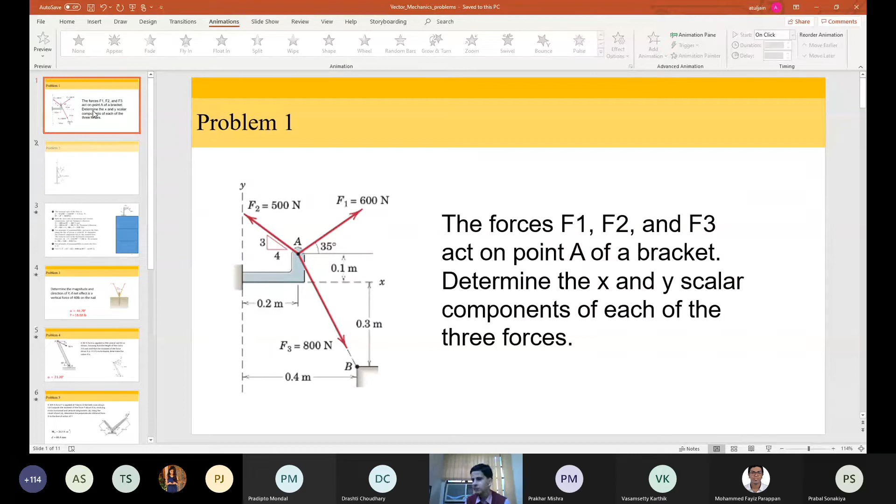So it's visible, correct? Look at this question. Is the PowerPoint visible to everybody? Yes sir, yes sir. So sir, look at this problem - it was also given as a part of your lectures.

Now, first of all, look at the figure carefully. What do you see? You see that there is a point and there are 3 forces in that. I'm sure all of you know that force is a vector.

Now in this figure, the first thing you should notice is that there are 3 methods given as to how the direction of a force can be specified. The first is most common, where the angle is given directly. The second is where a right angle triangle is given, the base and the perpendicular is given - when you approach situations like these, it is straightforward. The third one, the angle is not given in a straightforward manner - you have to calculate using geometry.

Can anybody tell me what is this angle, which I have drawn by 2 lines? 37 degrees sir. 45 degrees. 45 degrees, because 0.1 plus 0.3 is 0.4, and 0.4 is both the base and the perpendicular, so it is 45 degrees. No sir, no sir, it's tan inverse 2. It's tan inverse 2, correct, you are right.

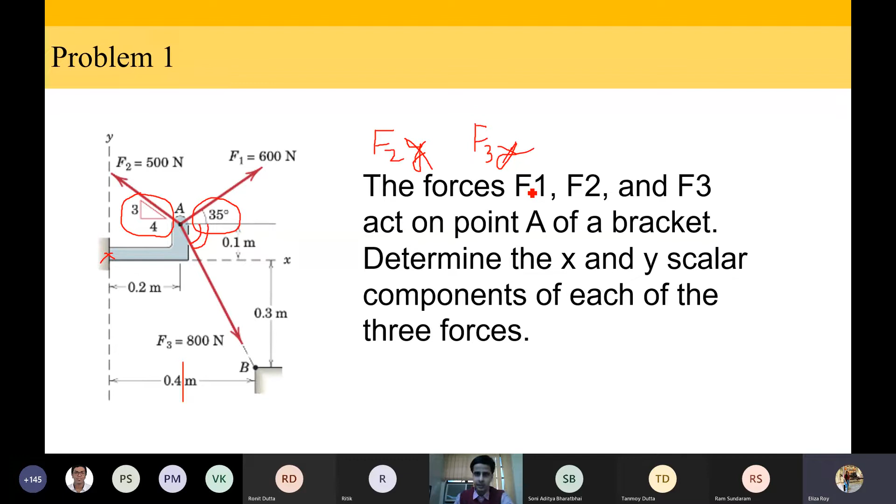No sir, it's the opposite - F2's X component and F3's Y component. Yes, that's correct. So this is easy, but make sure that you understand these things well.

Now look at the figure at the top right hand corner. If I tell you that you have to calculate the moment of force A about point O, how will you do it? First of all, what is the direction of R cross F?

K cap - sorry, inside the plane. Perpendicular to the plane of paper. Correct. So R cross F is mutually perpendicular to both R and F. Correct or not? Yes, sir.

Now my question to you is, physically why is that happening? Can anybody explain? One at a time, please raise your hand if you want to explain. Why is the moment about a point perpendicular to both R and F? Why?

Md. Shahreyar wants to answer. Sir, because moment is the cross product of position vector and force vector, the direction follows from cross product in physics. But that is all mathematical - I want a more physical explanation. What does the moment about a point signify, and why is that perpendicular to both force and radius?

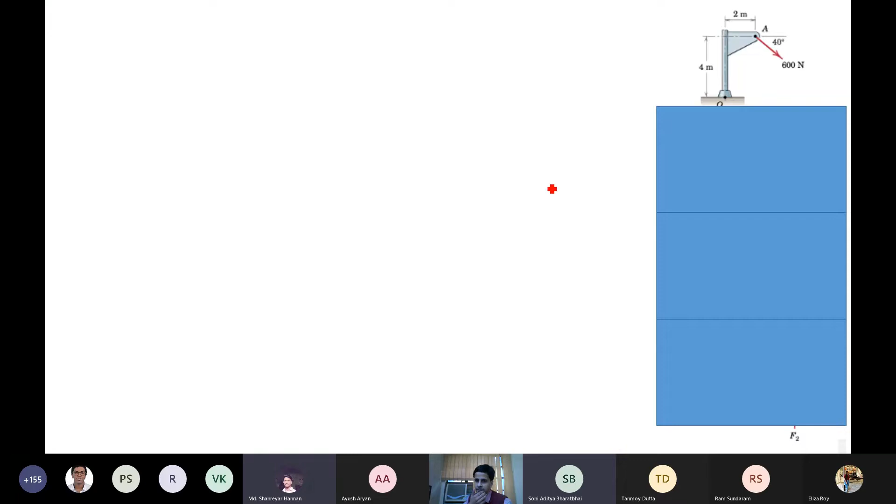There are a few more people - who wants to go next? Perhaps it is the direction in which a screw progresses. Soni Aditya, you want to try? Basically it's torque - the direction of torque will be the direction of angular acceleration which will be produced by the force. So if we look at this system, the force produces a turning effect, and the direction of the turn can be related to angular acceleration. That is correct.

So I am stopping the share to show you something. Imagine that you have a book kept on the ground, and you are holding the book from one side. Now if you apply a force in the plane of the book at one edge, what will the book do? The book will have a tendency to rotate. What is the axis of this rotation? Vertical, perpendicular to the book. Exactly. So when we are calculating moment about a point, this is what we are trying to do.

Clear? That is why the moment is going to be perpendicular to the force and the radius. Can you please explain again? My point is, imagine that a book is lying in a plane, or you are holding a book from one corner. I should normally be visible - I can see myself, so something is wrong with your setting. Now you are visible, sir. So imagine that you are holding a book from one corner, or that book is lying on the ground.

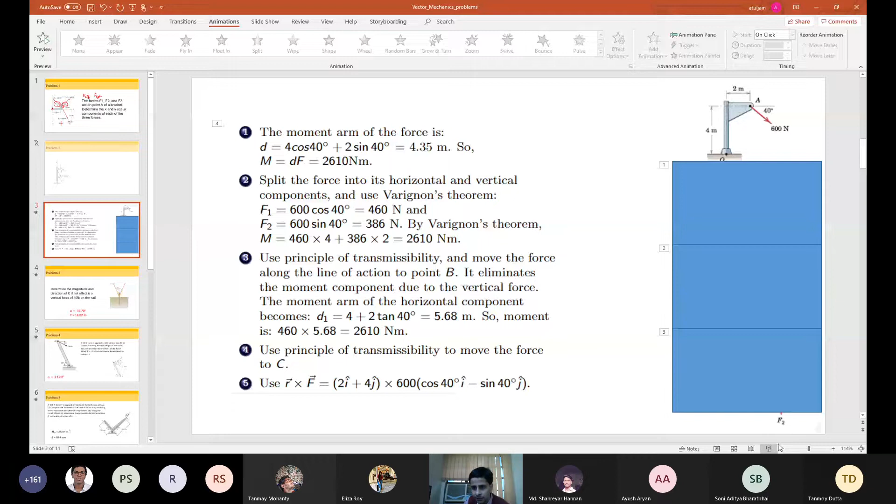Okay, so now I am looking at this. Now we have a force whose magnitude and direction is given, and we want to calculate the moment about point O. What are the different ways by which we can do this?

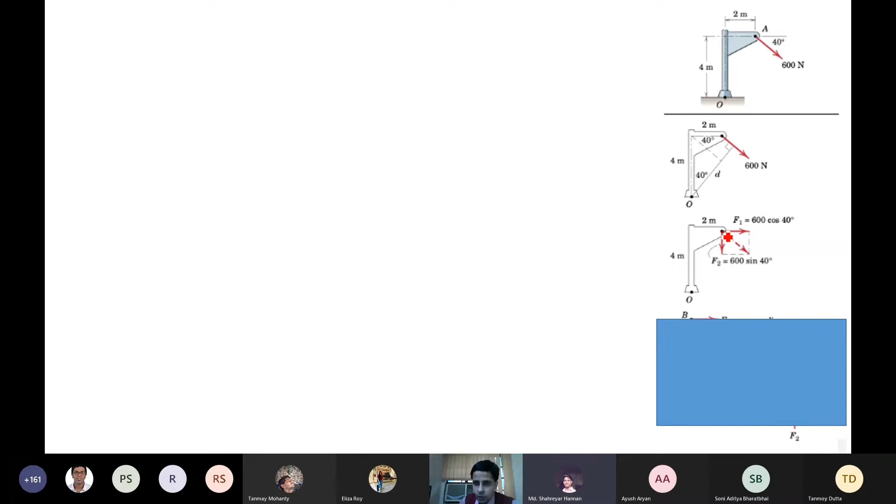First, we can calculate the perpendicular distance between point O and the direction of the force, and do F cross D. Or I could decompose the force into x and y components, using cosine and sine, and then calculate the moment - it would be F1 into this length, F2 into this length.

Or we also know that forces have this condition of transmissibility, so I can take my force to a point such that it is passing directly over point O. In that case, the F2 component will not lead to any moment - it will be F1 into OB, or similarly F2 into OC.

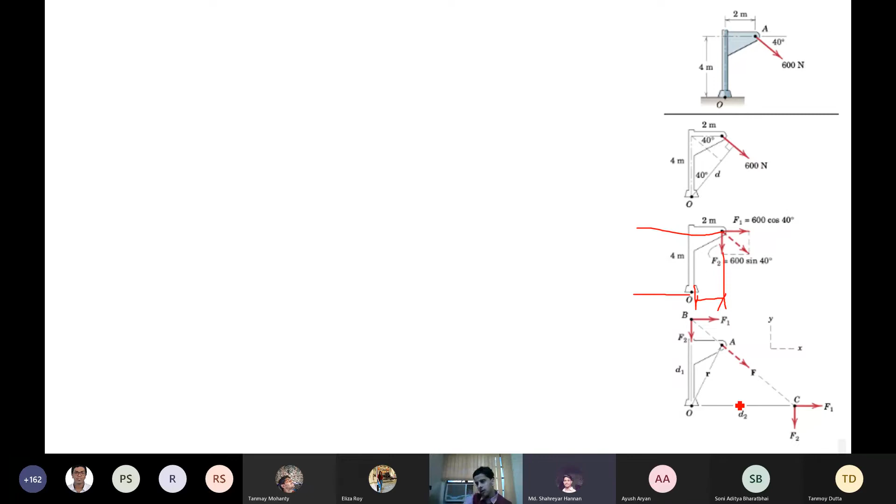So there are actually 5 ways, in fact many more ways when you think of it, to calculate a moment about a point. None of these 5 is wrong, and there's absolutely no reason to prefer one over the other in a general sense - it all depends on what problem you are trying to solve. In this course, there will be no marks for using a specific method. If you had to calculate moment about a point, you could do all 5 or any one of the 5, all would be correct. So our mechanics is very open-ended that way.

But it is nice to know all the different methods, because in different contexts, different methods will be much easier. So is the 5 different options of calculating the moment clear? This is also explained in the video by Dr. Puneet Patra.

Yes, sir. So from this slide, please take home the message that there is no one specific right way of doing it. It is open-ended, and as you go deeper and deeper into your engineering, it is going to be more and more like there is no only one right way of doing it. There are many ways - you have to choose as engineers, as students, which you want to do or which is more suited to a particular application.

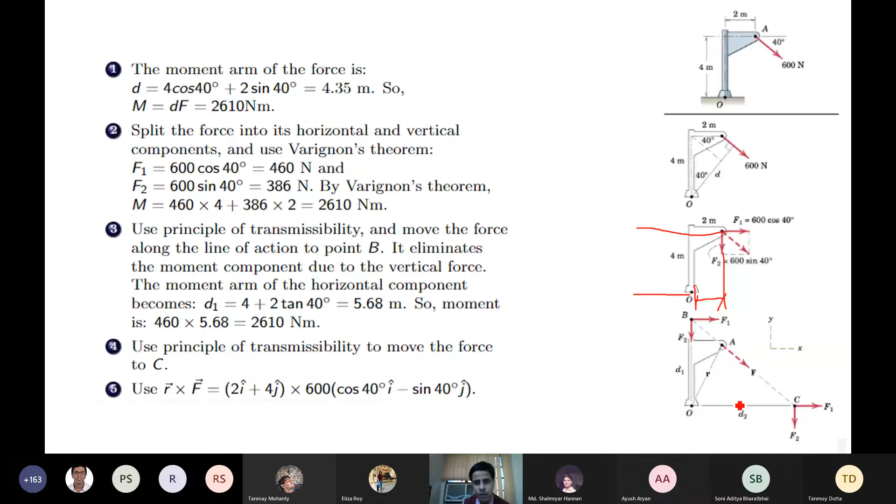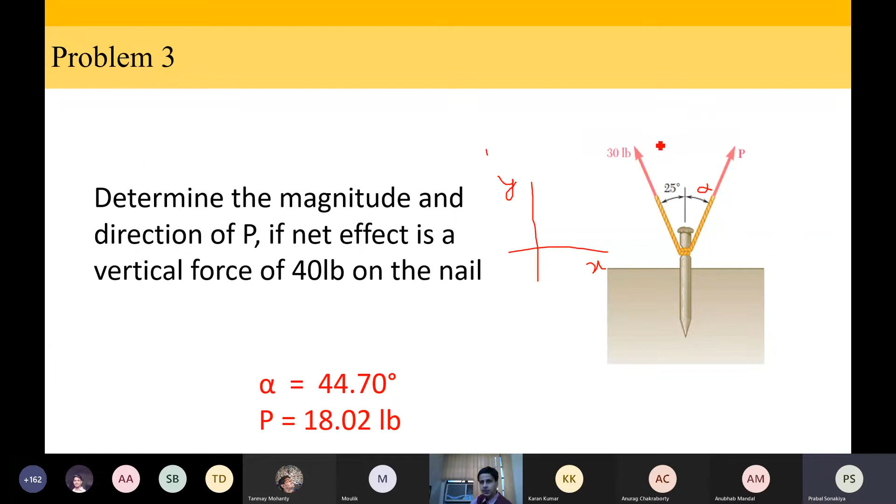So now let us look at another problem, which also I'm sure all of you have done today. We are just warming up.

Sir, in the previous problem, just for the sake of correctness, we have to look into the 0.02 tolerance value. So if you write somewhere between 18.01 to 18.04, it would be correct. Anything else would be wrong. Okay, 18.00 to 18.04, that is the range that would be expected.

Thank you sir. And 44.68 to 44.72.

Okay, so now a 90 Newton force is applied to control the rod AB as shown. Knowing the length of the rod is 225 millimeters and the moment is 13.5 Newton meter, determine the value of alpha.

So the first thing is, as I said, one of the first decisions you have to make is choice of x and y axis. You have two possibilities. One could be choosing your x and y parallel and perpendicular to the rod, like this. This is one possibility, and the second possibility is this. So which do you think we should use?

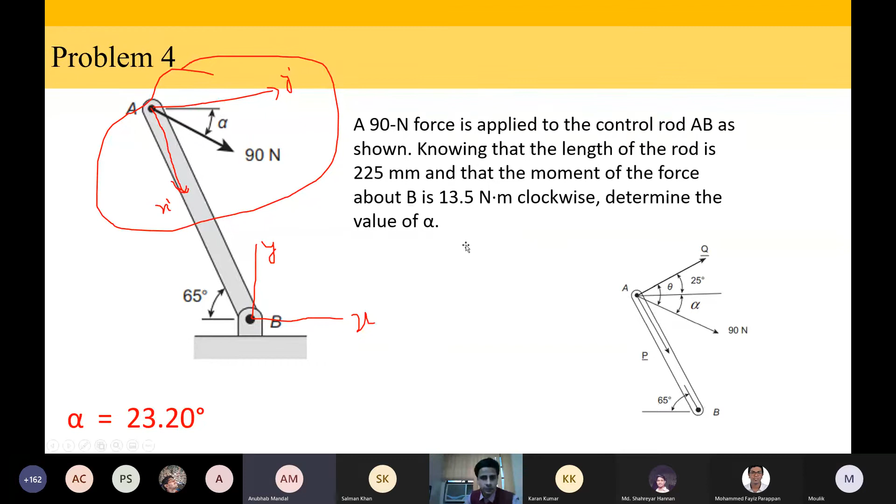Excuse me sir, please ask others to mute themselves, it's very difficult to hear you. Let me mute it, I will mute it. Okay, now I muted everybody. So where were we? We were in this slide.

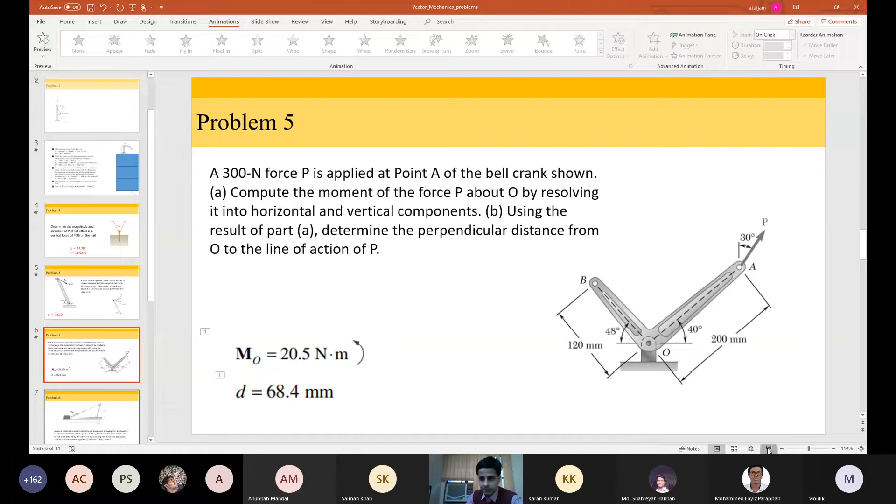Please read this question and try to solve it. A 300 Newton force P is applied at point A as shown. Compute the moment of the force P about O by resolving P into vertical and horizontal components. First step. And second step, using the moment that you have calculated, calculate the perpendicular distance between O and the line of action of P. Please try to do this, and once you get the answer, please put it in the message section.

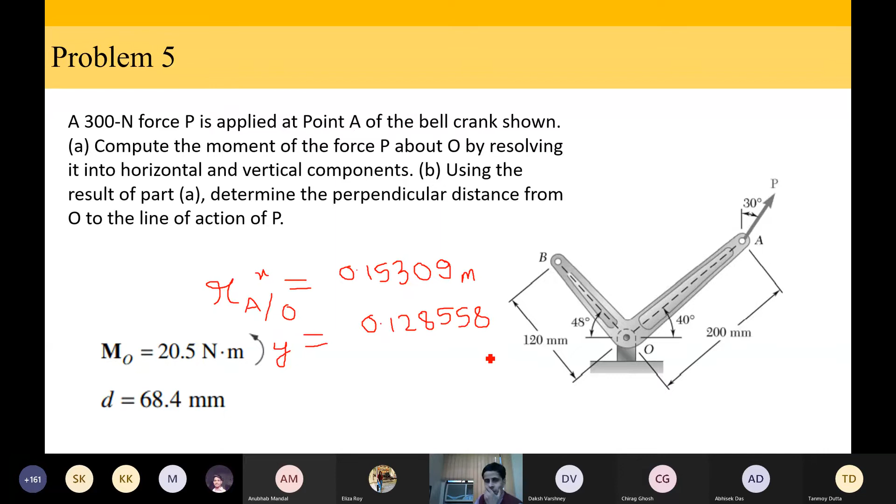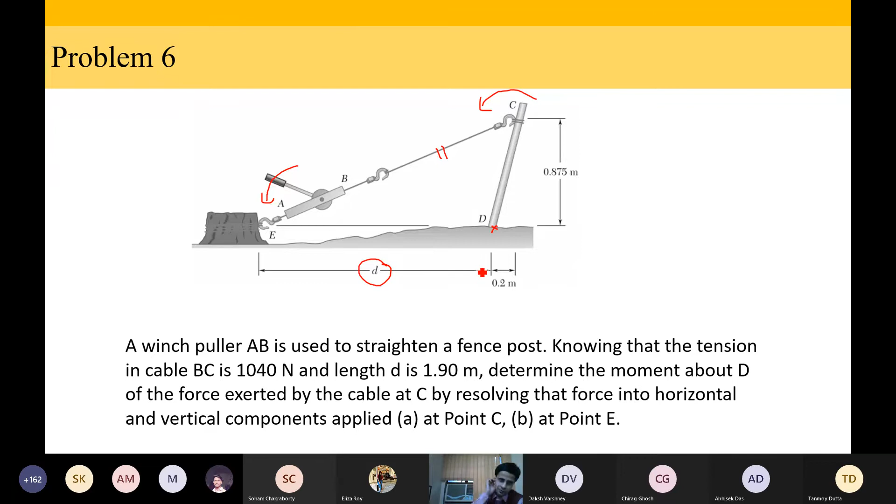My suggestion is try to draw only this member CD, try to draw all the forces and try to neatly understand what the different distances are. First step, you should try to do that. It will come out to be something like this.

So according to this figure, what I've done is this member CD is drawn here. TABX, TABY are the two components of force. This angle was derived based on the geometry: 0.875 divided by D plus 0.2 is your angle. So based on that, sir?

Yes. Sir, what is 0.2? 0.2 is this distance, the horizontal distance between C and D. CD is not a straight line. Yes, CD is at a slight incline. Thank you, sir.

So what is the moment? Can I say TABY into 0.2 plus TABX into 0.875? Correct or not? If you have got the answer as 760, it is right.

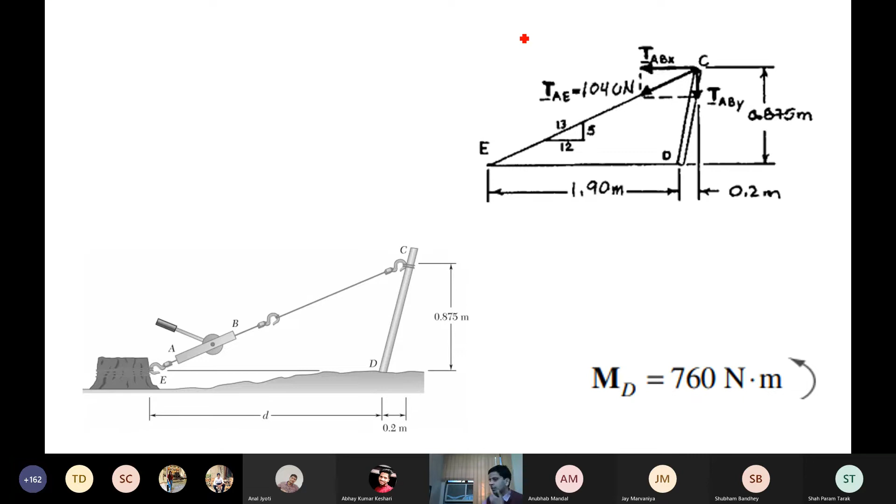Good. So all of these were 2D problems. In a 2D sense you are calculating moment, doing something related to the moment, trying to calculate different unknowns. The unknown could have been D, the unknown could have been the moment, or the unknown could have been the tension. Now let us look at a three-dimensional problem.

Raja, Newton is capital N. Newton was a very great scientist - the least we can do is, if a unit is named after him, we should use capital letters.

So, problem number 7, this is a three-dimensional problem. Now why do we study three-dimensional problems? Because sometimes getting a good visual understanding of the figure is not intuitive - sometimes you get it, sometimes you don't. But if your concepts of vectors are clear, then normally even without a proper intuition of the shape, you should be able to get it. So some practice for 3D problems is also very important, I think, and the more complicated problems are likely to involve 3D.

So now in this problem there is a bent plate, and in this bent plate you have - if we remove the cable, these are the two forces on the bent plate. Yes or no? If I remove the cable and I am just trying to look at the forces it is causing at my bent plate, is the force that I have shown, is it right? Yes sir, okay.

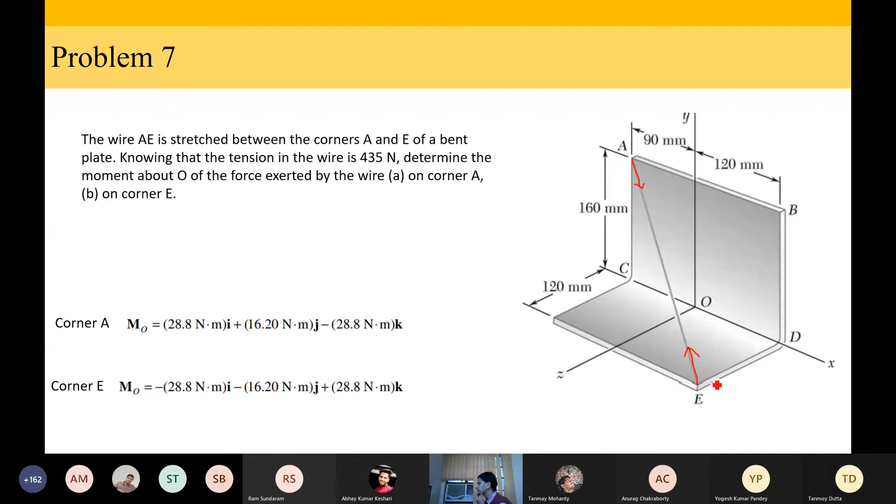Okay, Gorti, Abhirama, Yogesh, what did you not understand? What should I repeat? Sir, Yogesh, how to calculate moment to at A?

Yes. So what you will do is you need to calculate the coordinates of point A. You need to calculate the coordinates of point E, and calculate unit vector along AE based on the coordinates that you have calculated, multiply it with the magnitude of the force, which is this.

Or like this, you can also take direction. Clear? Calculate the coordinates of A, calculate the coordinates of E, and then calculate unit vector along AE, multiply that with 435, then you get the force FA in vectors.

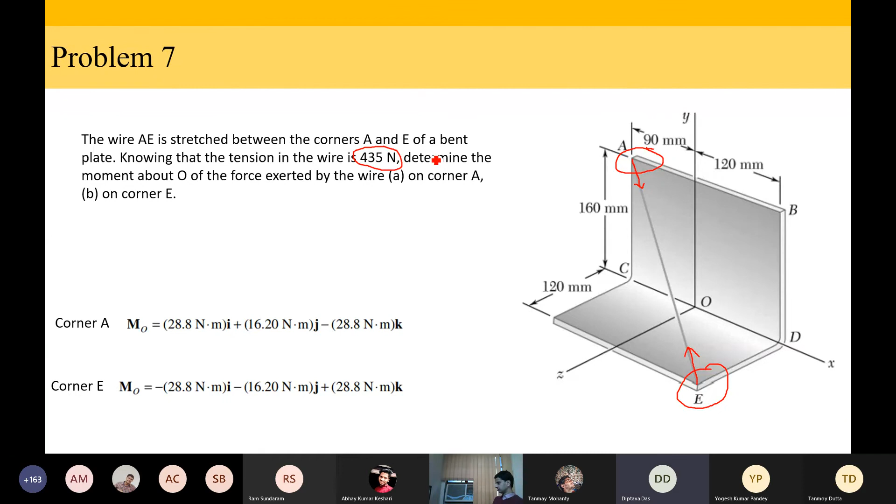Sir, I'm getting the answer. Okay. Sir, got it. Yes, sir. And please confirm that at corner A and corner E you are getting negative. Yes, sir. Got it. Good.

Okay, now the next question. Can you determine the perpendicular distance of point O to the wire AE based on the answer that we have just got?

Yes, sir. Right? What is the answer? Tell me.

Madan, Yogesh, Gorti, Abhirama, it is clear now? Or should I explain again? Yes, sir. Okay, yes sir, it is clear. Good.

So what was the value of MO? What's the value of the force? The 435.